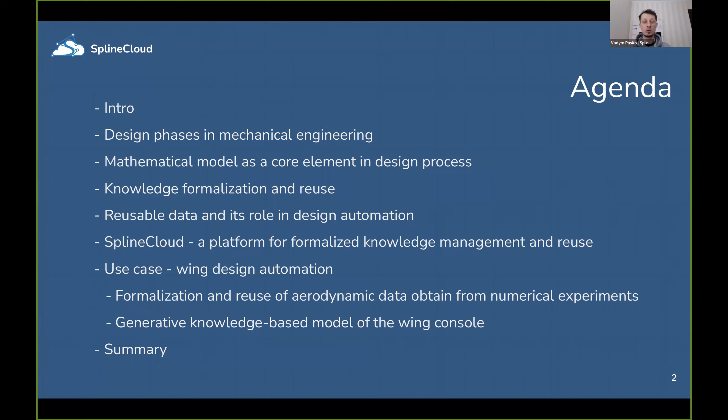Okay, so let me first speak a little bit about myself so you have a better understanding of who I am and why I'm talking about this today. My name is Vadym. I have experience as an aerospace engineer. I was working in the state design office Yuzhnoye for 10 years. This is the largest space company in Ukraine. And I was always working on conceptual design phases. I was involved in numerous projects, from unmanned aerial vehicles to aircraft, space launch systems, to lunar landers. I was also involved in exotic topics like the space elevator and many more.

So basically my career was always related to conceptual design. It's when you turn an idea into some digital prototype. And from my experience, this problem is really not trivial to tackle, because there are no standard ways to conceptualize your ideas. So there is always a high weight of creativity here. At the same time, there are some patterns that, when used efficiently, can simplify this process. And this is what I will talk about today.

So let's focus first on the very global aspect of things, the design phases in engineering, especially conceptual design, because there are later phases of design for manufacturing, product lifecycle management, and other things that we will not cover today. We are focusing more on conceptual design. It's when we turn an idea into a digital prototype. And efficient delivery of an idea and understanding the design parameters of our vehicle can be done only through the mathematical modeling process. If you are familiar with this, you would agree with me. If not, probably we can debate on that.

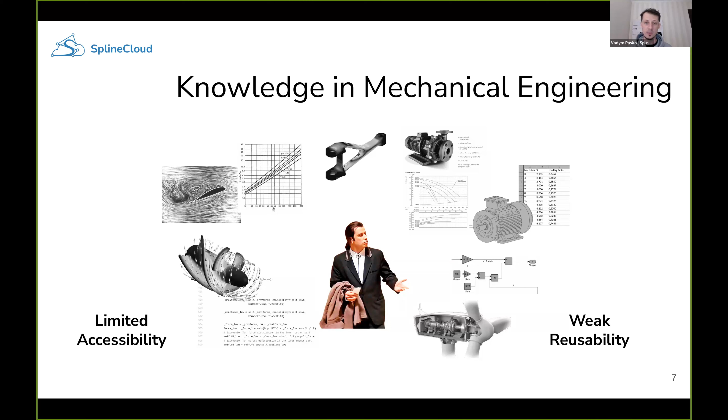But in engineering, knowledge comes from various sources and in various forms. And you can really get frustrated by how to convert all this knowledge into mathematical models. And the engineering software that we currently have complicates this process because of proprietary data formats and closed corporate ecosystems. And we can say now that, contrary to other domains, engineering knowledge lacks accessibility and has weak reusability. But to understand what reusability is, we should understand the process of how we can transform knowledge into a mathematical model. And this happens through the so-called knowledge formalization process.

So there are two general types of knowledge in engineering: either explicit knowledge or tacit knowledge. Explicit knowledge is simple. It's either laws of physics or design manuals, some engineering standards, something that has a written form, something that has already been covered in some documents. While tacit knowledge is something that wasn't really covered. It's based on our observations, our experience, some best practices in engineering, perhaps.

But in order for us to make a mathematical model, we need to convert all these types of knowledge into reusable formats. And these reusable formats have clearly defined properties. There are only three possible forms of this knowledge: either data, functions, or algorithms. You may think of functions as being part of algorithms, but I explicitly excluded these because functions can be inherent to data. So we can find relations in data and convert them into functions. So in this way, functions stand out from data and algorithms, in my perspective.

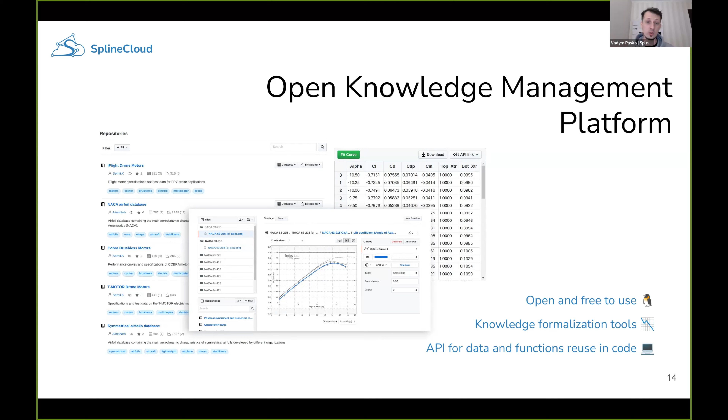So my team developed a cloud platform especially to address these challenges. Basically, SplineCloud is an open knowledge management platform for engineers and scientists. It is open, and it provides tools for knowledge formalization and reuse in your mathematical models. With SplineCloud, you can create a repository, process data, and reuse it in your code using our API.

When you work with SplineCloud, there is a very simple and basic pipeline. You create a repository for your data. You upload data from either your simulations or calculations, and you define data sets. If your data sets are not clean, you can extract subsets of this data with our tools. And if your data is graphical, for example, you are conducting research and you have a graph, or maybe it's historical data from some experiments, then you can apply our integrated tool for data extraction from graphs.

And after that, chances are high that your data represents some relations between parameters. So we provide a tool for advanced curve fitting, which helps you define some models in your data. And these models and data sets itself, you can reuse in your code using our API. So currently we provide client library for Python and MATLAB, and we are planning to support other languages. So here we accept contribution.

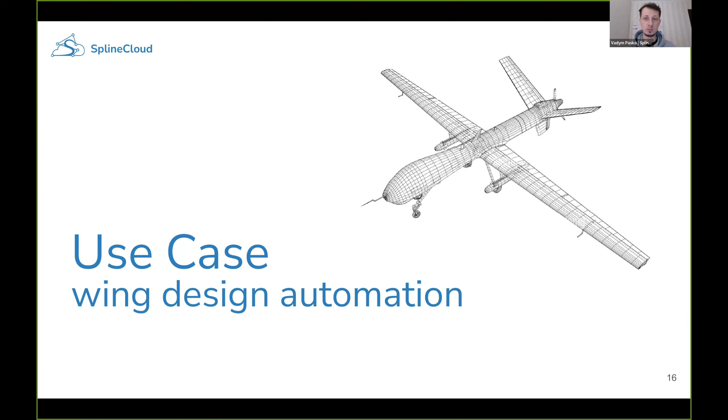So instead of speaking a lot about SplineCloud, I would like to switch to this use case to explain how it works and how the whole process and the idea of reusability can transform your approach to design automation. So in this example, I want to talk about the wing automation process. This can be a wing of aircraft or unmanned aerial vehicle. It doesn't matter much. It's more about how we set up this problem. So I want to start with basic principles. Many of you are probably familiar with these principles, but I need to cover them just to have a nice smooth path from the beginning to the final solution.

So as we know, the lift force and drag force are formed due to the airfoil shape. Because of the difference of pressure on upper and bottom surfaces of airfoil, we have this uneven pressure distribution, which provides lift and drag force. And engineers came out with two coefficients for that. There is also a coefficient for pitching moment. I just exclude it here from this example for simplicity. So we have lift coefficient and drag coefficient. And this coefficient essentially provides us with information on how lift force forms.

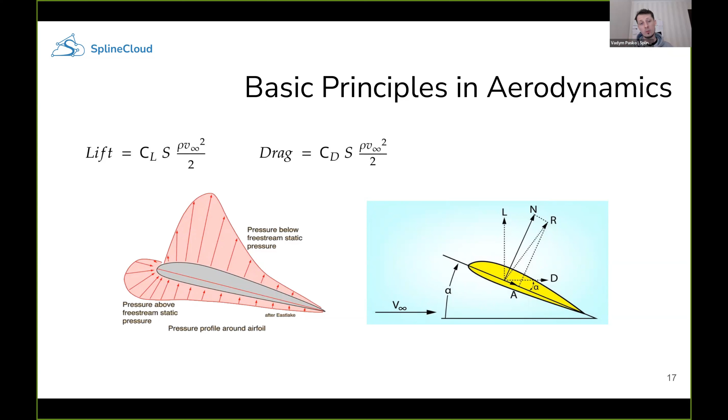And it depends actually on the velocity, on air properties, and more of that, it depends on the shape of the airfoil. So when we design an aircraft, the shape of the airfoil is usually the number one question. What airfoil should we use for our wing? Because wing is the main thing in the aircraft. And there are general recommendations on airfoils. For decades, engineers created different types of airfoils, and now you can select from the whole range of these airfoils. So there are general recommendations.

So if you, for example, are developing a high-speed aircraft, maybe long-range aircraft, you probably want to stick with low camber profiles. And if your target is the aircraft with high lift and low speed, probably you should take a look at deeper camber profiles. But thing is that it's not the only information that we can use. It's not enough for developing the aircraft, because we want to know exactly which airfoil to select. And because in engineering we face multi-physics problems, there is also a question regarding strength, regarding rigidity of the wing, and we have to account for this. And all these wing profiles really depend also on the inner structure and materials that we use.

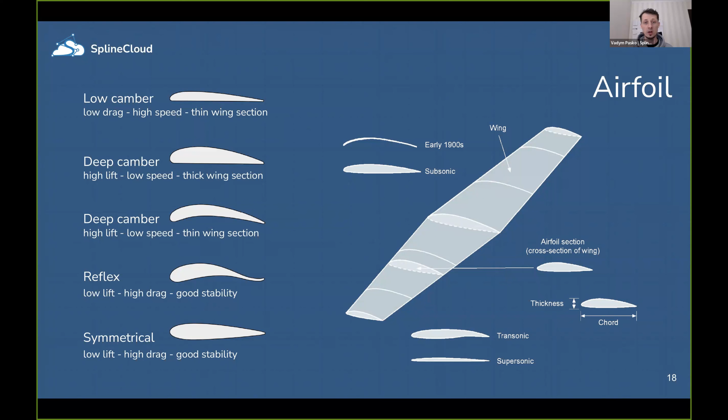And the only way to give the right answer for which airfoil we should use for our aircraft is to go through mathematical modeling process. When we model specific airfoil, we model internal structure, we solve for some equations, we consider constraints, and we come out with the optimal solution. And to do that, we need to process some data. So as for the airfoils, we have data on airfoil performance. This data was obtained over many years from wind tunnel tests and from simulation. We have nowadays open software that provides us with the ability to calculate these properties for airfoils. And there are resources that already have this data, for example, like Airfoil Tools. Probably familiar with this resource if you have ever had experience with designing aircraft.

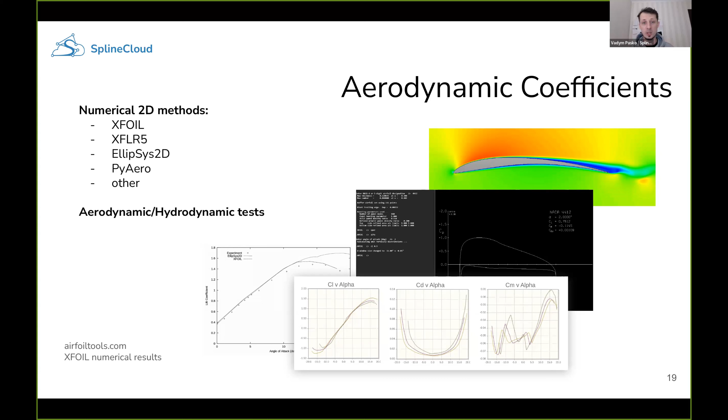So the thing is that processing this data, collecting this data is mundane work. You have to spend some time. For example, with the same Airfoil Tools, you have to download those data sets, you have to process those data sets, and you have to build collections, create folders with those things. And this goes through this data management process, which is not very pleasant work to do. At the same time, once we have this data on SplineCloud, you will see how it simplifies the work in design automation.

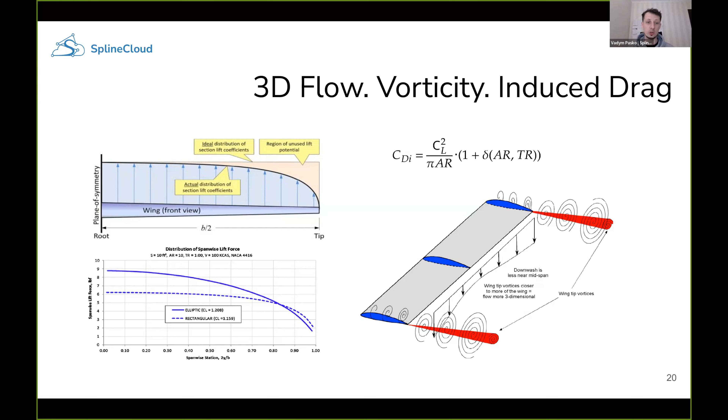But data on airfoils is not enough for us to go with, because we know about 3D effects, we know about the vorticity of the wing, and we know about this wing load curve that tells us how actual lift coefficient drops because of these vorticity effects. And this effect also produces so-called induced drag. So we also have to account for this in real case. And to understand how we can calculate this drop of lift coefficient, we want to understand what is the planform of the wing, because the planform of the wing impacts significantly our aircraft.

And similarly to airfoils, engineers came out with numerous shapes of the wing planform. So there are also general recommendations. So if you, for example, are designing a low-speed aircraft, you probably will want to use a rectangular wing, which is the simplest form probably, but it's not the most efficient one. For example, if you're racing for efficiency, you may want to use elliptical wings because they produce the lowest induced drag, but at the same time, they complicate manufacturability of the wing, and so on.

So we have straight planforms, we have swept planforms, we have tapered wings, which is just an approximation for elliptical wings. And if we design high-speed aircraft, we may use some swept or even delta wings. And especially if we take care about controllability and maneuverability, we may also incorporate some sweep angle for our wings. But again, we want to know exactly what planform we should use. And we don't have this answer because we don't have an answer for the rigidity, flexibility, the mass of the wing, and so on. So still we need to go through this mathematical modeling process.

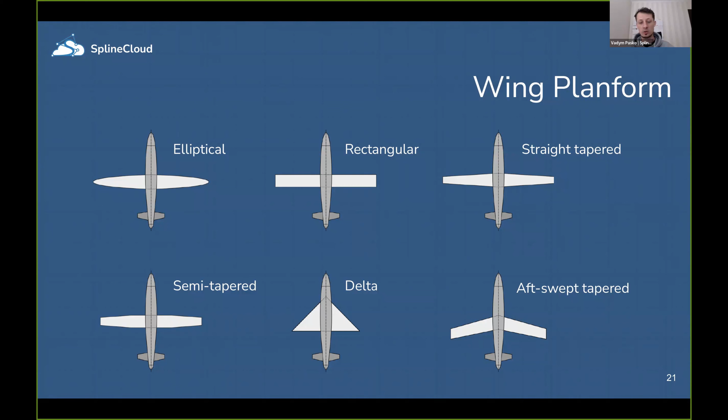And when we start looking in the literature and trying to find out what is the function of the lift distribution along the wingspan, we can discover some knowledge about this. We can discover that two parameters influence this mostly. It's the wing aspect ratio and the wing taper ratio. So the aspect ratio tells us how long the wing is compared to its root chord, and the taper ratio tells us how much smaller the tip chord is than the root chord. So we have this kind of shape.

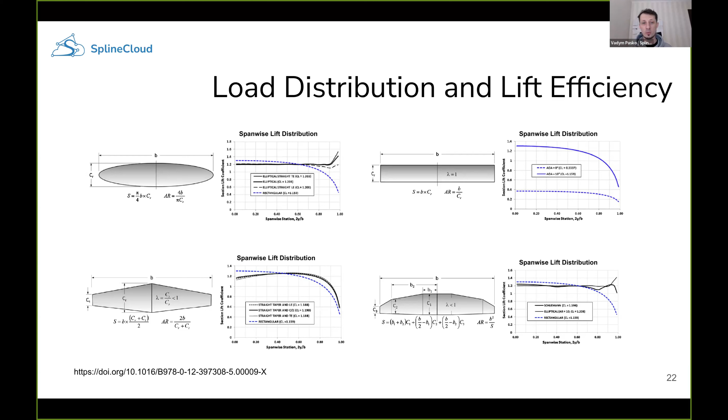But at the same time, when we start to try to find the empirical formula for this, we may fail because there are so many things incorporated in these lift distributions that you may end up with nothing, actually. You may find empirical data on rectangular wings, but for some complex wings, it's really hard to find some empirical data that you can rely on. And this is when we come to the idea that we need to perform some numerical analysis, and maybe run some CFD analysis. And this comes to the question, what CFD tools should we use for that?

Should we rely on heavyweight software that incorporates finite element methods and solves the Navier-Stokes equations? Or maybe it would be enough for us to use some lightweight software and maybe open software. So it really depends on how much you pay attention to the tolerance, so how exact a model you are building. So in our case, we already made some assumptions, and you will see new assumptions that we will make. And making these assumptions leads us to the conclusion that probably we don't need heavyweight CFD solvers. So we can stick with something simpler but reliable.

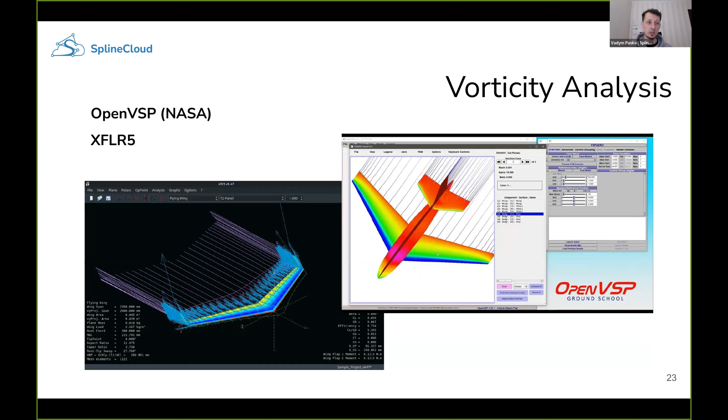And these are two tools that you can use. It's OpenVSP, open source software developed by NASA, and another open tool is XFLR5. I haven't used the second one, but I used the first one. So even these lightweight tools incorporate methods. For example, OpenVSP incorporates the panel method and vortex lattice method. They are really simple and converge incredibly fast compared to finite element methods. So it just takes seconds for convergence, but still we have to spend some time. So get ready for some handwork, setting up the model, setting up the speed and so on, and especially processing results. Because even using these fast converging methods, I spend more time on processing results. And this is exactly what I'm talking about, reusability, when you don't need to process this data.

So here is the wing that I analyzed. So I used a swept wing just for general understanding of the relations. And in this example, I used a fixed taper ratio. You may ask why I decided to go with this constant taper ratio. The thing is that when you look through the literature, you will find out that the taper ratio should be somewhere in between 0.6 and 0.8 to have a minimum induced drag. So there is not much variability in this term. So I decided to go with a constant taper ratio just to relax this additional variable in our system.

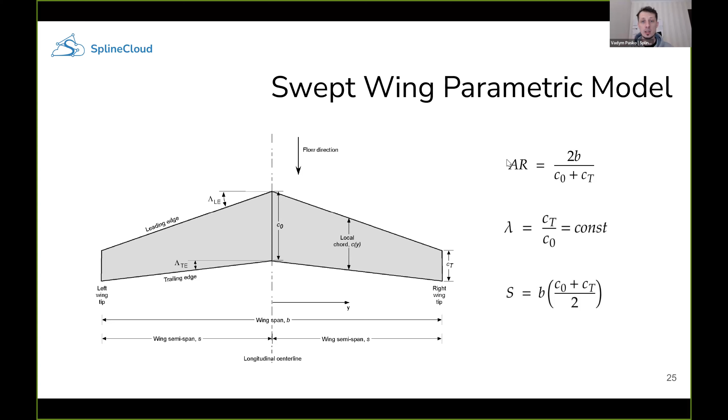So in this problem that we will take a look at today, we will vary the aspect ratio and we will vary the sweep angle of the wing and try to find out what the lift distribution function actually is for the wing. And for this, I proposed we use OpenVSP, and I used this for this example. And here I made some new assumptions, simplifications, just for this demo purpose.

You can use your own setup for your task, but for this task, I used no geometric twist, meaning that the root chord has the same angle of attack as the tip chord, so there is no twist in the wing, and there is no aerodynamic twist, which means that the root chord has the same airfoil shape as the tip chord. It has greater scale, but the same shape. And as I said, we used constant taper ratio.

And the one thing that I try to exclude from this simulation is the influence of the airfoil, because we want to go through different airfoils. So in this setup, the result is not essentially the lift coefficient, but the lift coefficient reduced by the airfoil lift coefficient. So in this way, we eliminate the influence of the airfoil in this task. So we end up with the result of reduced lift coefficient, any way you pronounce this in English, so the coefficient of coefficient.

So we end up with this function, which relates on 4 parameters. It relates on the coordinate of the wingspan. It depends on the aspect ratio, on the angle of attack, and on the sweep angle. So this is what we can study, and this information would be more than enough for us to come out with our design.

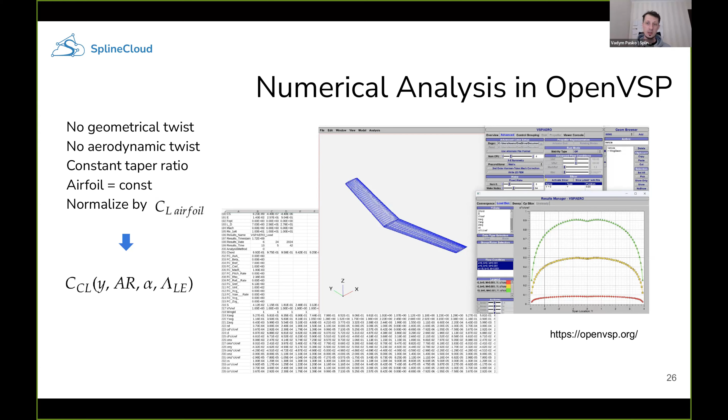So once we have all these simulations performed and we have defined extracted data sets. Yeah, I forgot to mention. OpenVSP provides you with the result files, the Excel files that are really clumsy. So get ready to dig into these Excel files and extract some data sets and prepare clean data sets. And this is exactly the knowledge formalization process. So you set up experiments, extract data, mark data with metadata, give names to data sets, and this is essentially the process of extracting knowledge and making it reusable.

So for that, we can create a repository on SplineCloud, specifically for our experiment, upload our data sets, upload our data files, define relations, and build these functional relations between parameters to understand how this drop of lift coefficient changes with wingspan for different conditions, for different sweep angle, for different angle of attack. And this repository provides us with the ability to integrate these results into our mathematical model.

So once we have these relations, for each relation we have an ID on SplineCloud, and we can use this ID to construct a collection of these curves, of these efficiency curves of the lift coefficient. And once we construct this collection, we can build two-dimensional functions, so-called response surfaces, which will be used by us as a function in our code, in our process of automating design, in the process of design optimization.

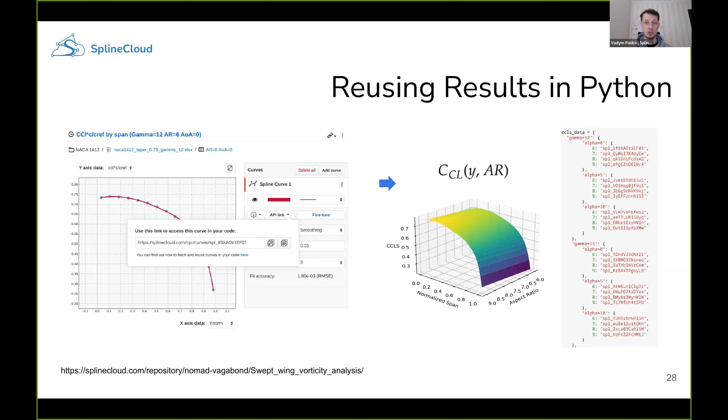So we have this two-dimensional surface, which we can instantly evaluate for any points on the wingspan and for different aspect ratios to give us understanding what will be the drop of lift coefficient. And for data on airfoils, there are lots of resources for open data. You can already find some repositories with airfoils on SplineCloud. You can go the same path, use the same approach, and create a collection of airfoil data, which will tell us how the lift coefficient depends on the angle of attack.

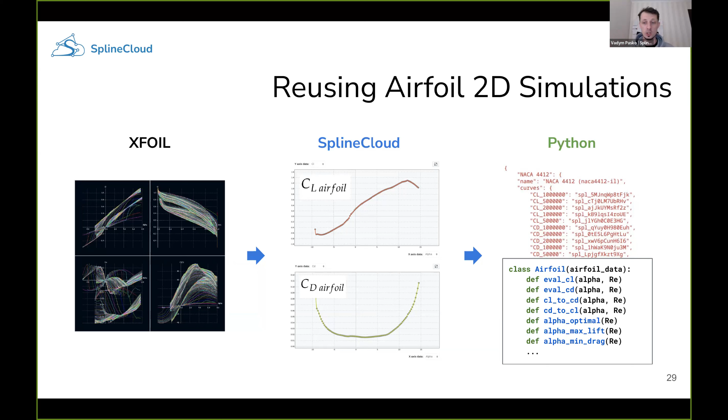And we can create a class of airfoil in our Python code to evaluate the actual lift coefficient, drag coefficient, depending on the angle of attack. And now we can combine our results. So we can combine and multiply these curves, the curve for ideal lift coefficient for the airfoil and the curve for non-ideal drop of this lift coefficient, and actually build another response surface, another two-dimensional function, which will tell us what is the actual lift coefficient depending on the wing coordinate and depending on the angle of attack.

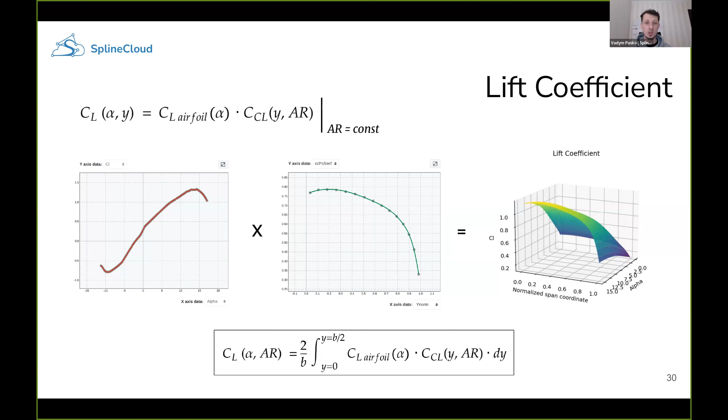So for example, if we set constant aspect ratio, we can create a collection of such response surfaces for each aspect ratio. And of course, we can go through numerical integration to calculate the cumulative lift coefficient for such response surfaces and so on. We can also end up with three-dimensional and four-dimensional response surfaces. It's just a matter of taste how you perform this. Maybe those three-dimensional, four-dimensional surfaces would just be harder to visualize.

So in this way, now we have clearly defined all functions that we can use to give us the answer: what is the lift distribution on the wing, and what is the drag force acting on the wing. And with these functions, we can now vary many different parameters. We can vary airfoils, angle of attack, sweep angle, and aspect ratio. And for each case, we can instantly evaluate the lift force and drag force. And not only that, we can have the lift distribution on the surface of the wing.

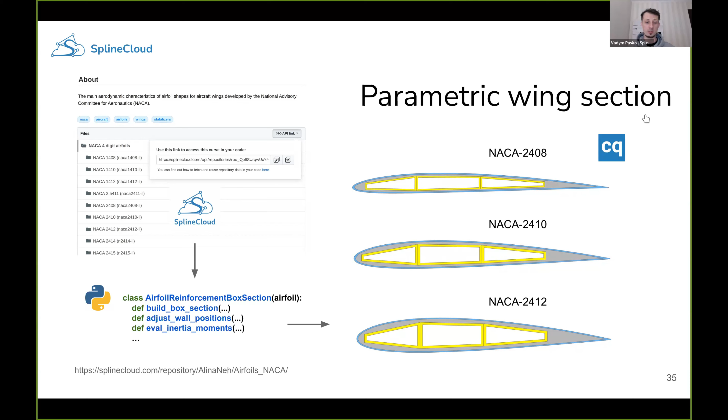And now, once we have this section class, we can go through setting up the whole knowledge-based model of the wing, meaning we have the 3D geometry. We have methods for calculating lift, drag, and lift distribution. We have methods to assign materials. We have methods to calculate mass of this console.

We have methods to calculate mass of sections, and we can define methods to numerically integrate those forces and solve for rigidity of the wing, for flexibility of the wing, using simple formulas from the strength of materials. And this model will allow us to iterate through different designs in the range of our defined design parameters and find the optimal solution much faster than it would be done with manual work.

So compare: you do this manually with some classical CAD system, and you go through numerical simulation on each iteration, multi-physics simulation. You have to solve for strength, you have to solve for aerodynamic load. It will just take you weeks or maybe even months of work.

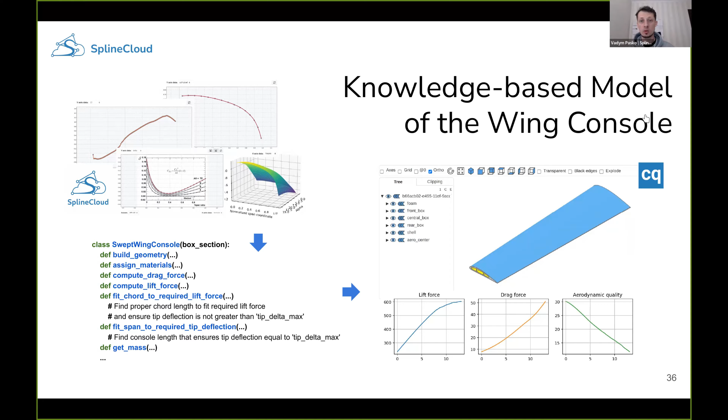So this knowledge-based model is a simplified model. It doesn't account for many effects, but at least with this model, you can iterate through hundreds of designs in just one or several hours instead of weeks or months of hard work. And this is the beauty of the knowledge-based engineering approach. Essentially it gives us the opportunity to optimize design, to come out with the optimal solution.

I will not speak much about optimization today, because design optimization, multi-physics optimization is a really interesting topic, but it goes beyond this webinar. I just want to give you a taste of how we can approach solving the geometry for our requirements with this knowledge-based model. Essentially, we can define two nested functions.

In one function, an internal function, we can define the strategy to fit the wingspan to the required tip deflection. So we can gradually increase the wingspan until the tip deflection is 10%, for example. And the external function will vary the chord of the wing. This function will repeat the iterative process of the internal function until we have a wing of the area that is needed for our lift force, with the same tip deflection that we defined. And this is how we solve geometry for required parameters.

Of course, we can define different strategies for our optimization. It's up to you how you approach this problem. And this is the beauty, because once you have defined this model, you have the source code for this model. And if it's open source, somebody else, or maybe you in the future, can adapt this model, include some new knowledge, some new ideas, and improve this model gradually. So over time, you will end up with a more detailed, more accurate knowledge-based model.

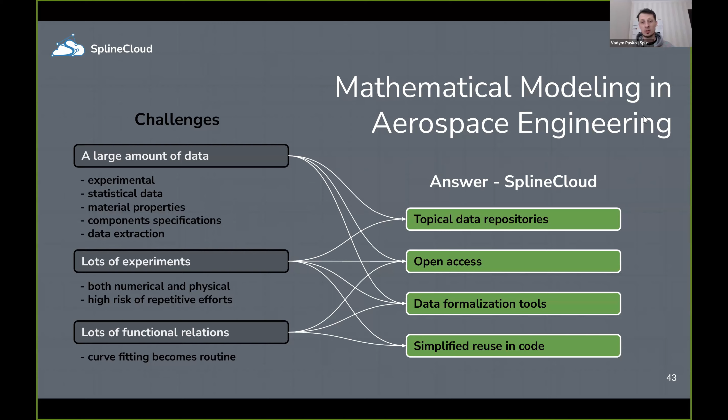Vadim, thank you. It was very interesting. I guess Boeing won't have any other problems this year after seeing your presentation and development of the aircraft. Thanks. Okay, but in any way, so please, your questions.

Vadim, thank you for this webinar. Maybe could you please provide a few other examples of how we can use the instrument, for example, in other fields, not in aerospace engineering, but maybe electrical engineering? Is it applicable or not? Maybe other fields? Sure. Thanks for the question.

If I were an electrical engineer, probably I would be able to answer your question. But since I'm an aerospace engineer, I'm more about the aerospace applications. But I'm pretty sure there are cases. For example, when I was studying robotics, it was a course on Coursera, and we had this data about the optical detector. So there was data about different detectors, what is the range it works. So the amplitude of this detector against the distance.

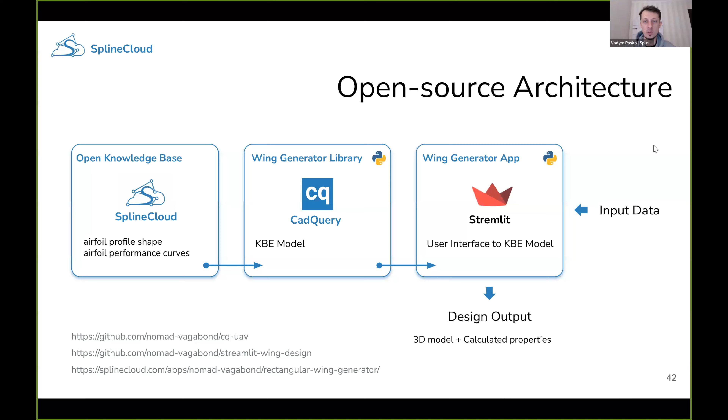I believe so. What I showed today is a very simple application, based on response surface models, or meta models. But on this slide you have the open knowledge base, and on SplineCloud you can place all these specifications. You can place tables with all these requirements. It's all about how you access this data in your code.

With the SplineCloud API, you can insert IDs for these data sets in each knowledge-based engineering model. So each model will have a reference to these specifications, and if they change over time, this ID will not change, and the model will adapt instantly. So it's all about how you write code for this knowledge-based engineering model.

Since this code is open source, maybe you don't want to open this, maybe you want to keep it for yourself. It's perfectly okay, but it's about how you define the rules. You can place these rules and standards on SplineCloud in clearly defined repositories and data sets, and other people can use these standards too, since standards should be open, right? So the idea of this architecture is to split the data source from the model, from the code.

Yeah, okay, thank you. Of course every new idea is a compromise, and a lot of experts in their own sphere would like specific requirements for their sphere, and of course it's difficult, but it's really interesting work, and good luck to you.

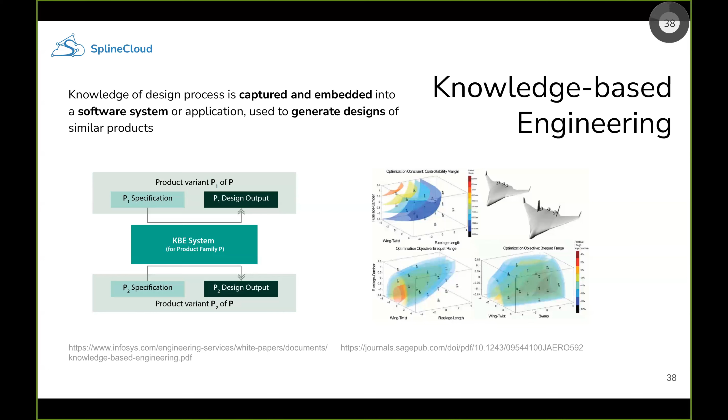In previous slides, you showed us that you consider some deflection of the wing when you model it. Yes, some bending. And as you know, when aerodynamic loads act, we get some deformation, and this deformation of the wing has some influence on aerodynamics, and we have an aeroelasticity problem.

Are you planning to include this phenomenon, I mean the elasticity phenomenon which causes wing deformation, and consider this deformation as some geometrical twist of the wing and the redistribution of load after wing deformation? Are you going to do it? And if yes, what model do you plan to use? Sure.

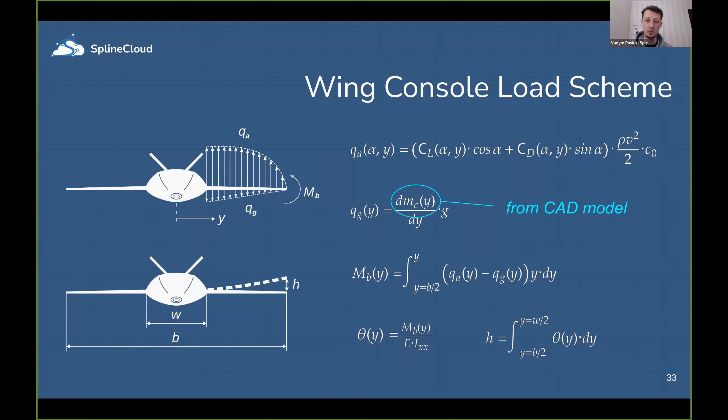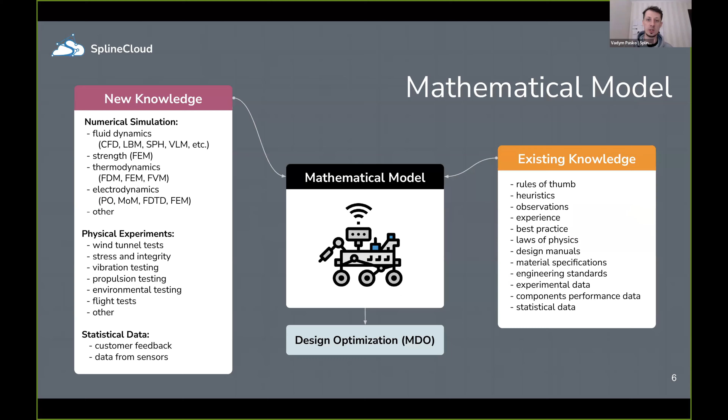Thanks for your question. I clearly understand your concern about this approximate model, which doesn't account for aeroelasticity problems that will actually change the lift distribution because of the bending of the wing. This is one of the approximations of this model. When we talk about the mathematical modeling process, we always have to consider the trade-off between what we can do with our time, resources and knowledge to answer the main design questions.

Of course, the model we looked at today is an approximate model. It doesn't account for the change of lift distribution due to the bending of the wing. But once you have this model set up and the source code at your disposal, currently it's not open because it's something I did recently, I haven't updated the GitHub repository with this code, but I will do this soon. Once you have this, you can include your ideas

and think about how to account for these elasticity problems. You can try to deform this wing model and run a range of simulations for the deformed wings to see how the lift distribution changes. There are lots of questions that can be applied to this mathematical model. But we always end up with a model that approximates things, and we have to consider trade-offs between our time and the quality of answers. So this would be my answer to your question.

Thank you. If I have a mathematical model for elasticity, can I integrate my mathematical model, some function, into your tool? Can I combine your tools and my function? Yeah, I believe it's possible. It's about how your function accounts for the wing planform and the wing rigidity. It's debatable, but I believe it can be integrated. It's about understanding the source and the methods you used to obtain this function.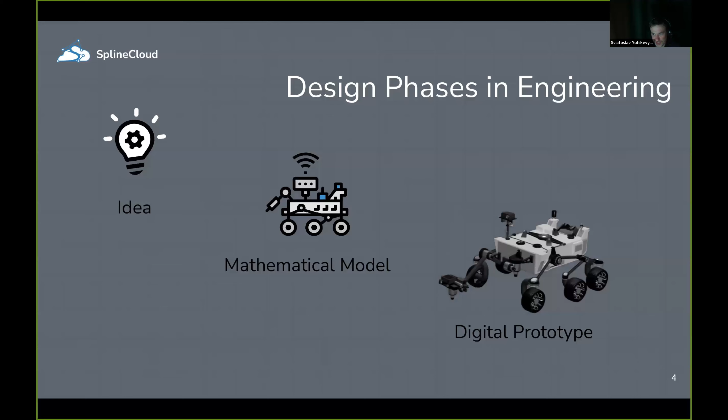So maybe a short question to you, Vadim, about the future. What is your vision for the future of SplineCloud, and how do you see it evolving to meet the changing needs of the engineering and scientific community? How could your platform be adopted? For example, Python nowadays is not brand new, but the most favored language. If a new one appears, could you adapt SplineCloud for the new language and other tools?

Thank you for your question, Sviatoslav. I see the future of SplineCloud as a role that GitHub made for open source initiative in software development, because we have GitHub right now. If we use Python or a different language, we can efficiently exchange these knowledge-based models. We have libraries, but the problem is that our models rely heavily on data, on experimental data.

And I see SplineCloud fits into this ecosystem and provides a source for this data and a platform for sharing this data and enabling each other to contribute to mutual projects, design projects. If you look through GitHub repositories, there are tons of interesting projects, but very few of them are related to engineering because of these complexities, because there is no solidified, well-defined structure of open source engineering.

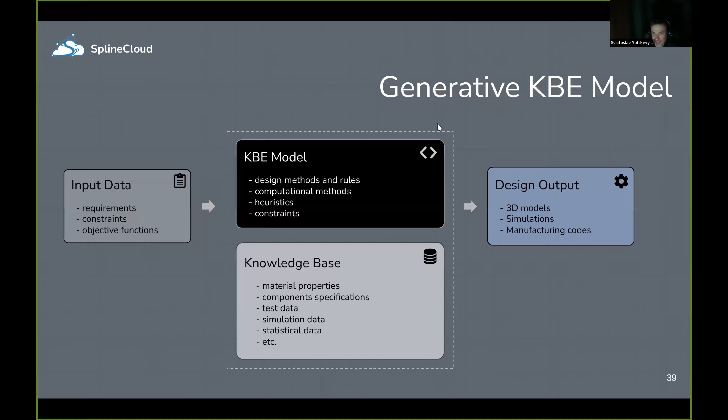I would like to wish you to stay tuned and see how it will evolve and what benefits this platform could bring for your research. It's my own opinion, but it's a very powerful tool that may be useful in different spheres, different directions. It's not only UAVs, not only aerodynamics, you're just restricted by your imagination. And here I think you have a good opportunity to realize your ideas.